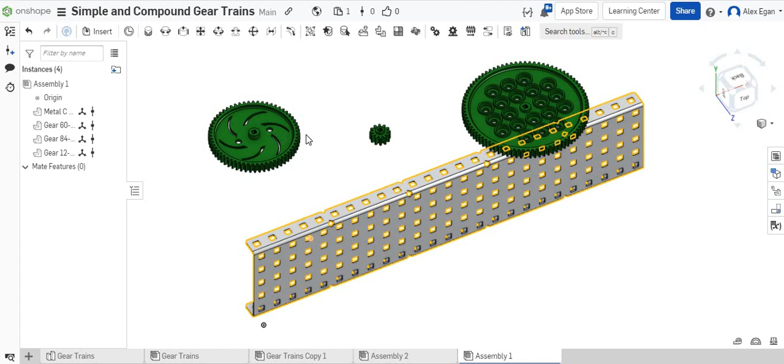I inserted a little metal base and then 3 gears. I have a 60, a 12, and an 84 tooth gear.

First things first, I'm going to fix this metal piece to the ground just so we're not going anywhere. I'm not going to do any drive shafts or shaft collars. That's in the simple gear train video.

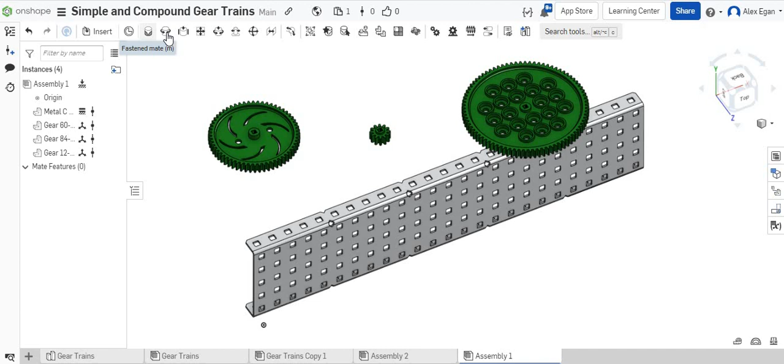If you do want to see how to do that, you can go back and watch that video. But here I'm just going to show how to actually link multiple gears.

So as you're starting with your first gear, we'll just choose a 60, it doesn't really matter. I'll go to this middle point right here to get this stuck to our metal base. Again, how do you get to a mate point there?

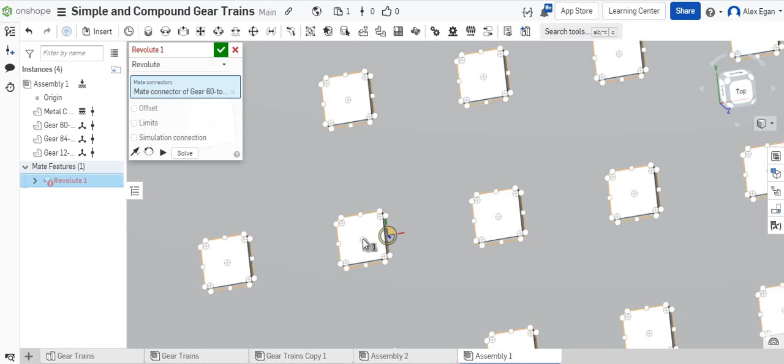You can just hold the shift button, move over, click, and let go. It should pop right in the middle. Flip our axis so our parts are not going inside of each other. So we got the first one on there.

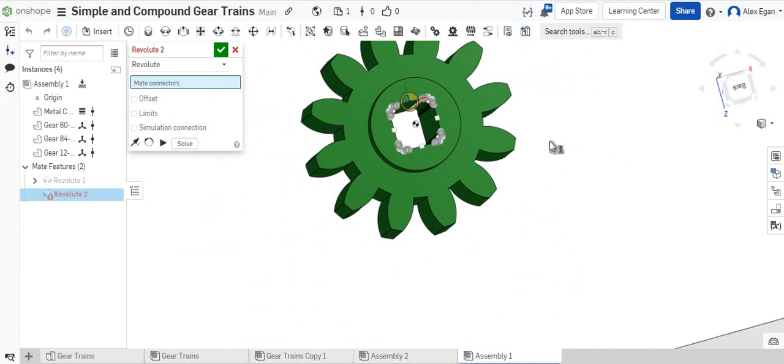We'll put the little one in the middle. Why not? We can do a revolute mate. Let's look at this little 12 tooth gear here. Perfect, got right on the middle point for us.

Again, we can put our 12 tooth gear right here. That looks wonderful. Let's flip it and lock it in.

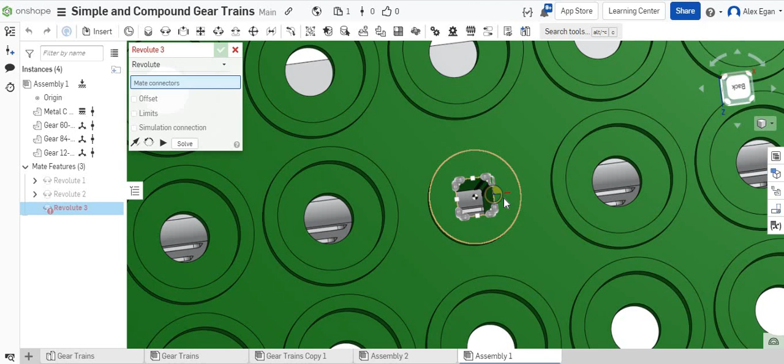And then lastly, let's put the 84 tooth gear on here. All right, so let's rotate that around a little bit. We can hold shift, jump to the middle, click, let go, and that will get us that center point right there.

Again, for the spacing, one away would be the 12, then the next one is the 36, the 60, and the 84.

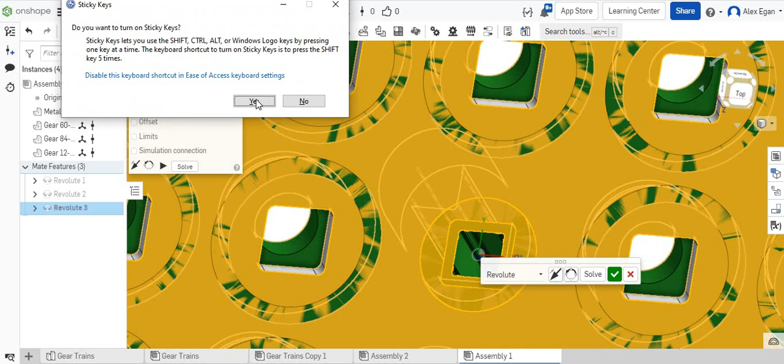So we know that we want to put this one here. Hold shift, pop it there, move it. Oop, I'm getting sticky keys, we'll just close out of that. And then let's rotate this around so our parts are not inside of each other. Let's go green checkmark, and we'll lock that in.

Again, very similar to the previous video, I now have 3 gears. They all individually spin, because we did revolute mates with these gears, they're all able to spin. Now we want to tie these gears together using a gear relation.

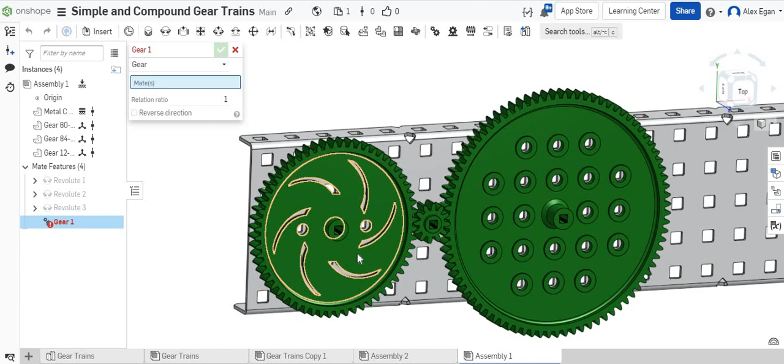So if we talk about our input and our output, if I'm putting my effort into this first gear, that's my input and this is my output. So I'm going to choose my second gear, and then choose my first gear.

Again, if we're going output over input, I have 12 over 60, because that's the number of teeth I have. We can just check this really quick as we zoom in.

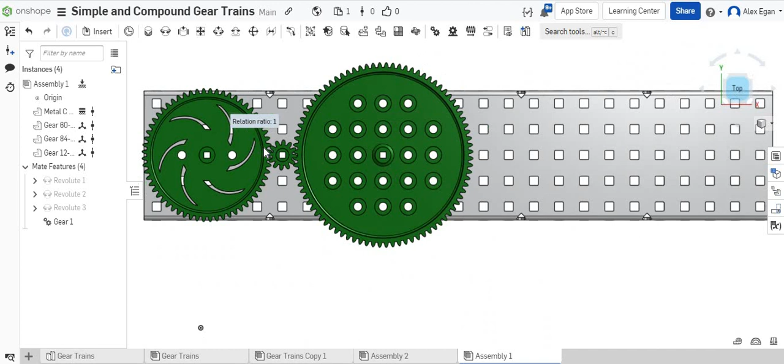If I click and hold on this, my direction of rotation is correct, and those teeth are hitting in the same spot every time. Even though they're running into each other, that's fine, we can fix that in a minute.

I'm just going to kind of move that back there. Oop, I went back too far. There we go. So let's do the second one now.

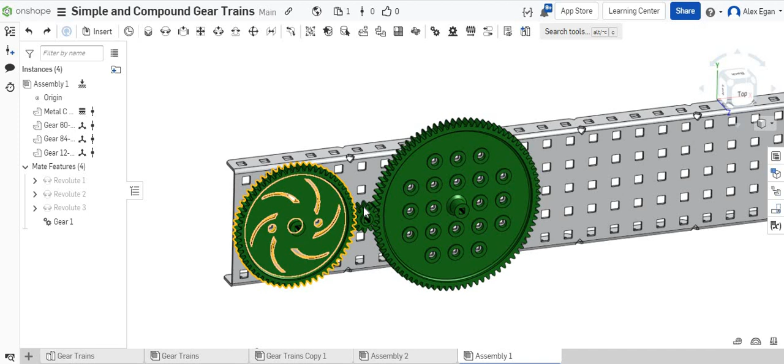I've created a gear relation between this first gear and the second gear. Now we want to do the second gear to the third gear, so we can do a gear relation.

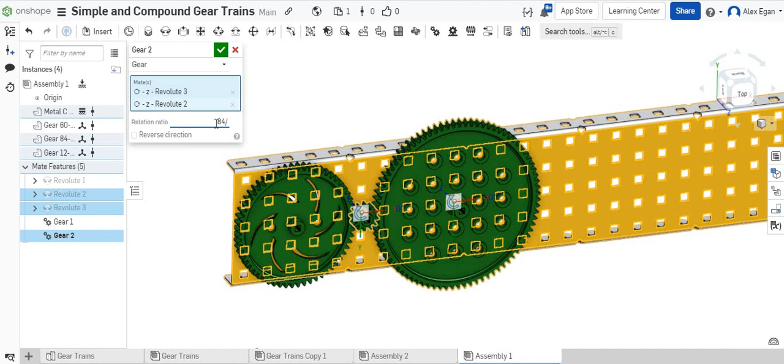Now this one is the input, the large one is the output. So we say revolute 3, our output, then revolute 2, which is our input, output over input. So we have 84 over 12. Let's lock that in, and again we can check this one now.

Let's zoom in on these teeth as I pull this one down. Again, the speed is correct, the rotation is correct. So now let's get back to this last step.

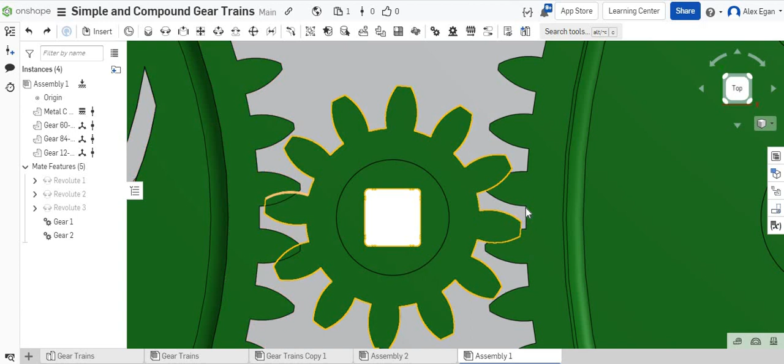We want to make sure that our teeth are meshed, right? Like right now we're colliding on both sides. So what I would recommend is changing the two on the outside.

So you could go to your first revolute mate. Yep, that's the one that highlights the gear. Let's double click on that. Again, we want to move our gear and do a new rotation angle.

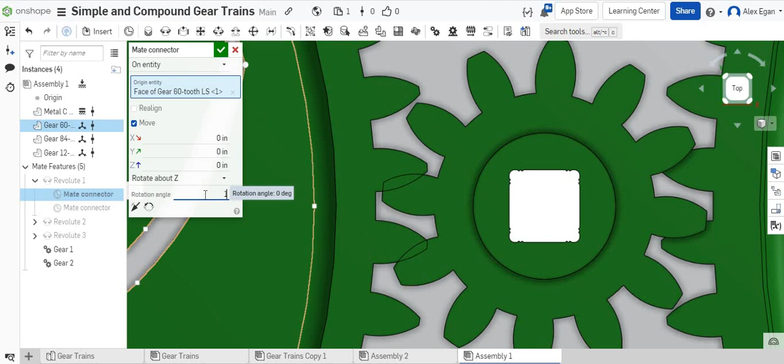So if we're looking at this part right here, let's just start with a 1. I think we're going to get pretty lucky there. We can lock that one in. So now as I turn this, those teeth are perfectly meshed.

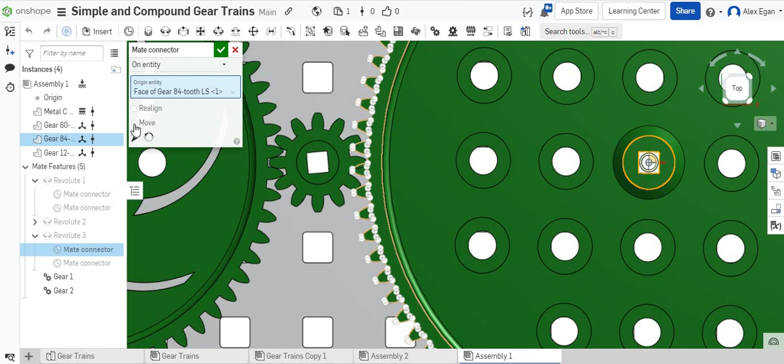As we jump back to this one now, I'm going to look at revolute 3. Again, this first one is the one that's the gear. I'll double click on that and we'll say move, because we want to move this outside 84 tooth gear. For the rotation angle, it's going to be probably different for each one.

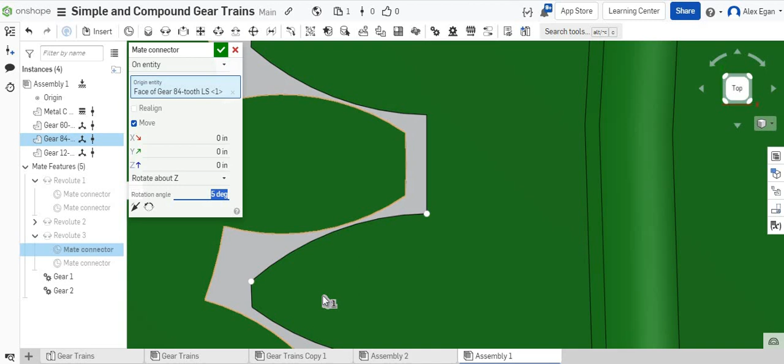So I did one that looked like it was way too much. Let's do 2, 3, 4, 5. Let's do 5. Okay, I do have some clearance there, I think that looks pretty good. We'll say sure, 5 degrees.

We'll say green checkmark, and again we can check this one now. Our teeth are perfectly meshed, and we're not having any collision.

And then something that I like to do with this as well is, if we go to our revolute, we can go to animate, and then we can just click play, and now we can see our simple gear train with idler.

I think that looks pretty cool. It's all functioning together, and we have the correct rotations. And then again, if you want to slow it way down, we go to steps.

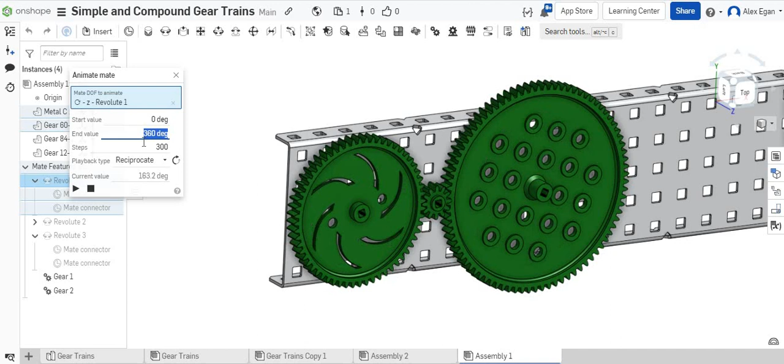I don't know, we'll do 2000, sure. As we push play, again we can look at our simple gear train, perfectly meshed teeth, and everything's going in the correct direction. So that is how you guys would create a simple gear train with idler gear.